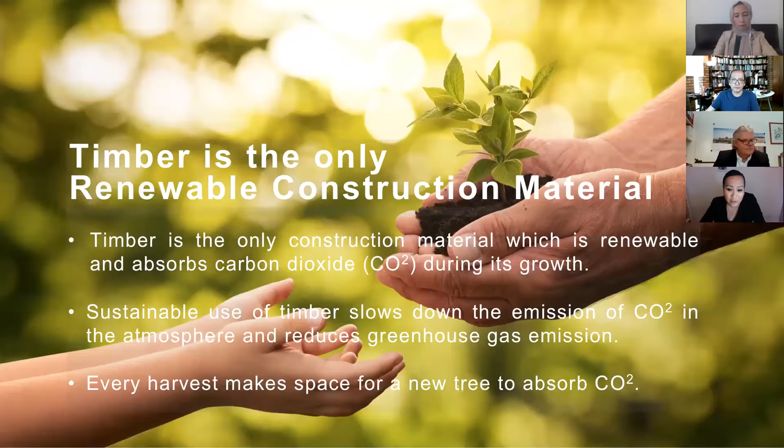What is not very common and well known is that the use of timber can help to save the climate. Sustainable use of timber can slow down the emission of carbon dioxide into the atmosphere and reduce greenhouse gas emissions. The use of timber helps to save the climate more efficiently because it's not only renewable, but also every harvest makes space for a new tree to absorb carbon dioxide.

The use of timber not only reduces the environmental impact on the planet, it also helps to reduce the consequences of the industrialization of the 20th century. Now we need to build a better environment for the next generations. The next point I need to talk about is the source and where the timber is coming from. So now we go back to Europe.

Forests cover about 30% of the earth's land. Austria is a small country in the center of Europe. It's one of the countries in Europe that has the highest forest coverage. In Austria, about 50% is forest area, and that equals 3.4 billion trees.

There is always a concern about what happens if you use too much timber for construction. But in Austria, in Europe, we are quite lucky because we have sustainably managed forests. More trees are growing than being cut down for construction and other uses, so we will not have a shortfall of timber material and bring harmful impact to the environment.

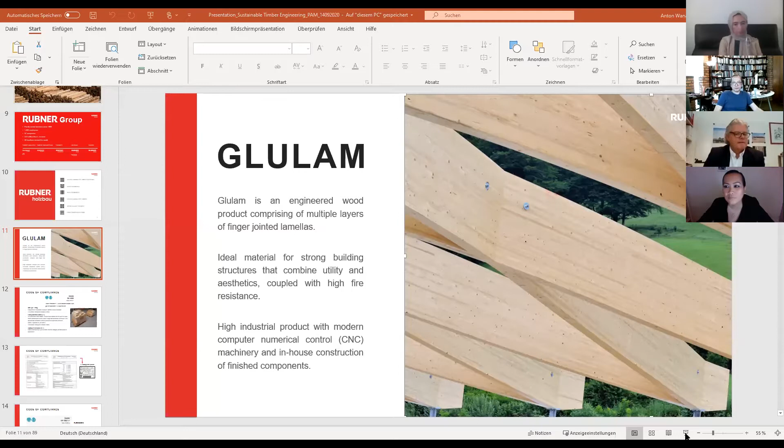Okay, ladies and gentlemen, let me quickly start my part. I'm really happy to be here, and it's my big pleasure and my honor to talk about glulam as a material, and then to tell you a little bit of the story, what brought us here to introduce glulam in this part of the world, and about this journey which brought us here, starting all with the Mactan Cebu Airport project, which I will talk about a little bit more in detail later on.

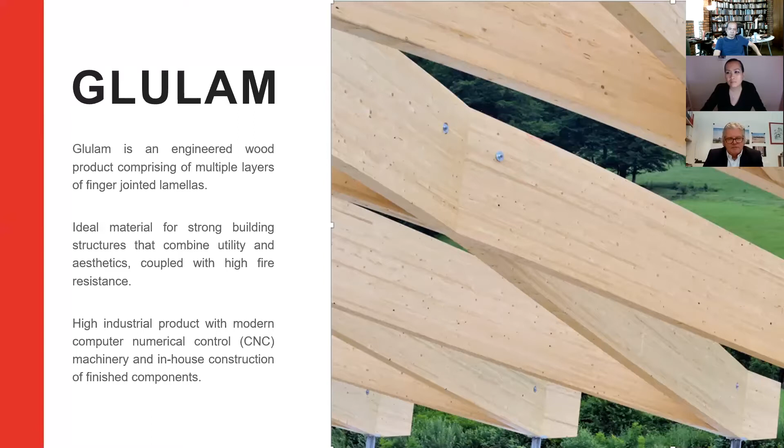But let's continue first with the glulam itself. So as Phyllis has told you, first it starts with the material itself from the forest. And what we then have to make out of it is an industrial product, which we can be sure is always at the same quality with the same properties. Because any natural material always has a range of qualities and a range of properties. But with this process, making it from the natural material to lamellas, to an industrialized product, this is the step where we are in a position to do engineered structures with it.

And the code of compliance, how glulam is manufactured in Europe, where most of the glulam in the world is coming from, all following European codes, is EN 14080. It's more or less the golden book for manufacturing glulam. If you set up a glulam factory, there has to be an initial type testing. This is a very long and very painful process with hundreds and hundreds of samples being tested, to make sure that all the machinery and all the process is in place and in compliance with the code. And as part of the code, there is the factory production control.

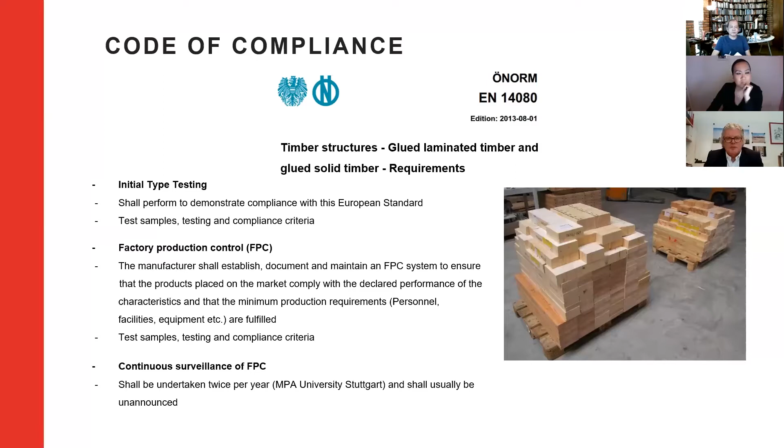That means every day, as a daily routine, numerous samples have to be taken and tested. And on top of that, there is a third-party inspection twice a year coming out of the blue without further notice, checking if your own in-house factory production control is in place. So this is to make sure that we really have a continuous quality on the product. And with that, we have this CE marking.

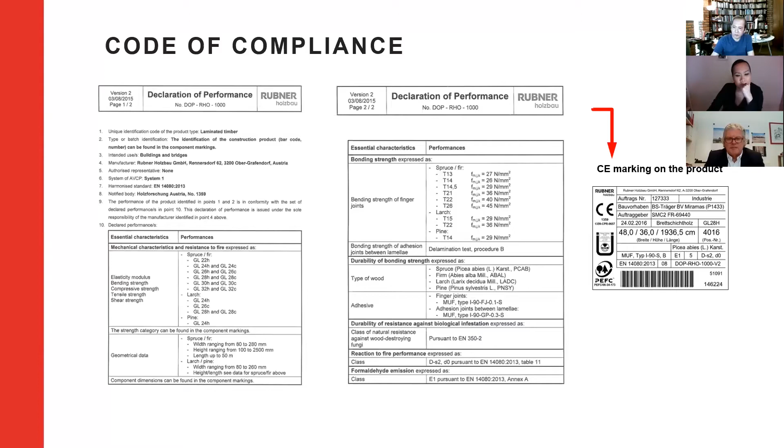So that means each and every little piece coming out of our factory, and not only out of our factory, of all factories in Europe manufacturing following this code, has to have this sticker on it. It's a small label giving all the information about the quality, the size, and the properties of this material. So you can be 100% sure that what is manufactured following this process fulfills the requirements you have up front.

So up to now, we have only been talking about the material, but just as important is to have a reliable instrument for the design, because we need to know how to design all these structures. And for the design part, we're also relying on European codes. There is EN 1995, Eurocode 5. It's the design code to which timber structures have to be designed. Compared to other codes in the world, I can say that even the basic design code, Eurocode 5, is one of the most advanced design codes for timber structures in the world.

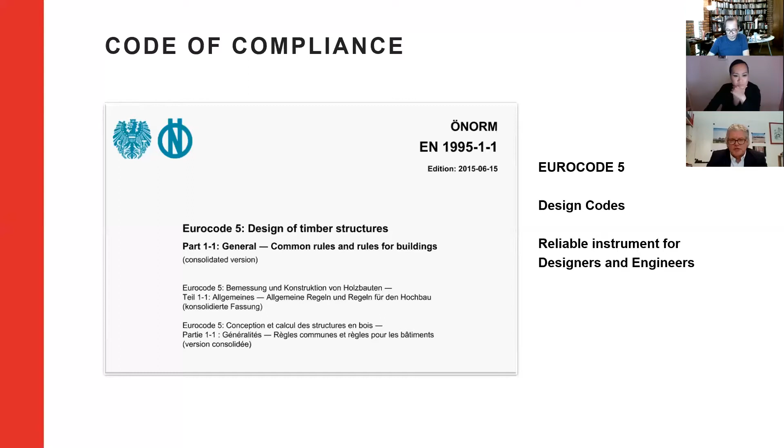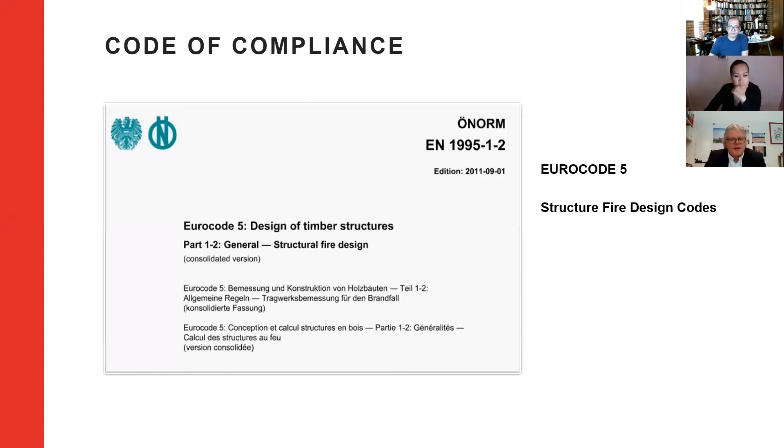And on top of that, there is also an instrument for how to design for fire resistance. Inside Eurocode 5 there is also the code for structural fire design. So we have the material, which is tested. We have the design code for the structure and for the fire design. And we have all the certificates. And with these instruments, we can now move on and think about how to make buildings with it.

In Europe, that's a long story and not really something new. But to take it into Asia, there are some considerations and a number of questions I'm always being asked. The main considerations and issues people have here are how to deal with fire, how to deal with termites, and how to deal with the tropical climate. So let's have a closer look, topic by topic.

First, fire resistance. As I've said just before, we have this fire design in Eurocode 5, where a particular part, EN 1995-1-2, is only about structural fire design. And the idea behind it is to achieve fire resistance by oversizing. Timber is a combustible material, so this is nothing we can really change. But it's very predictable how it behaves in fire. That means we have a charring rate of generally 0.7 mm per minute. And with this information, we can then design the remaining section of the glulam and make the justification for it.

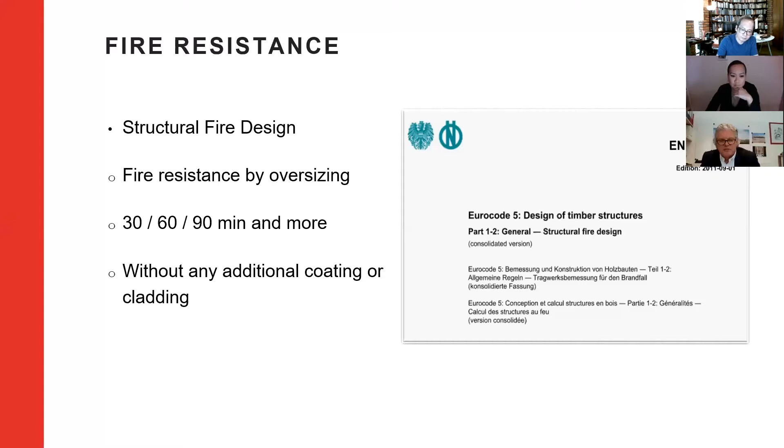So that means we can design a timber structure for 30, 60, 90, or what we now have, especially in Singapore in some cases, 120 minutes fire resistance without any additional coating or cladding. It's simply by pure oversizing for what we are losing during charring in the case of fire. So this is the concept behind structural fire design following Eurocode. The next topic is the termites.

So we also in Europe have some insects, and sometimes we have to do something against that, but termites is a different story. I have learned there are some preventive measures which are more or less given things in Asia. That means chemical ground treatment is more or less done in all of the construction sites, including some measures like termite mesh in the foundations.

And what we can do in particular for the timber, and this is what we are doing, is chemical glulam surface treatment. That means it's a chemical treatment which is brush applied to the surface of the glulam. I have to say the glulam normally is coated anyway, either with 1 or 2 layers of surface treatment, just to protect it from getting any dirt or any stain into the surface. And before we apply this, we would apply an additional layer of anti-termite treatment.

And the other thing is, in the way how we construct it, we have to make sure that we make it as difficult as possible for the termites to access the timber. For instance, if we have a structure which is going directly to the ground, we always have to separate it. It's what is shown in this detail here. So never put the timber directly into the ground, which should not be done anyway. So we always have to separate it, so that there is at least a distance of 250 or 300 mm until it touches the ground.

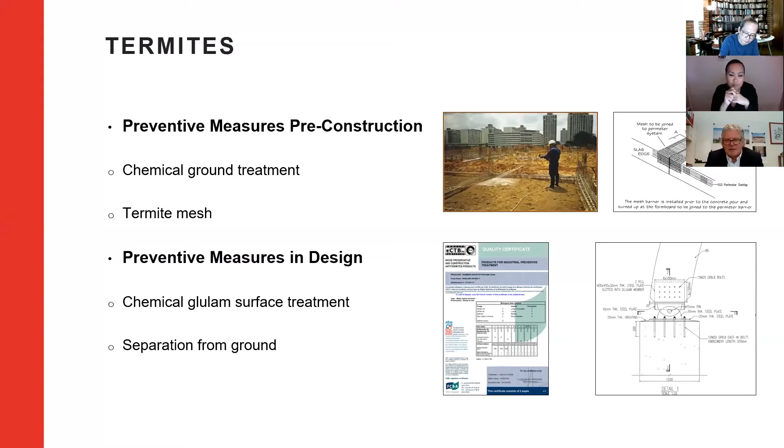And the third thing I've always learned, I've also learned from local people here, is that there should be a frequent inspection, let's say at least once a year, from a professional pest controller to make sure, just in case there's something going on, it's detected at an early stage.

The third topic, which I am frequently asked, is how to deal with a tropical climate. Well, climate always has 2 parts. The one is the temperature and the other is the humidity. Temperature basically is not the issue for the timber. Humidity is to a certain extent. With the combination of temperature and humidity, the timber is taking on a certain amount of moisture, and this leads to a level which is called the equilibrium moisture content. And there is nothing you can do against it, because this equilibrium moisture content is the amount of water the timber will take on under the environment it is exposed to. And this depends on the temperature and on the humidity.

And we have put in here in this slide the climate graph of Kuala Lumpur, which tells you about the temperature and the humidity. And I would say the maximum is a temperature over the year of about 33 degrees Celsius and a relative humidity of 66%. And there are calculation methods and graphs where you can find out with these 2 figures what would be the equilibrium moisture content. And for these 2 figures, it would be 11.7%. The minimum would be, following this graph, 22 centigrade, about 60% humidity, and that would lead to 10.9%. And for the timber, however, in the long run, whatever is lower than 20% is absolutely no issue at all.

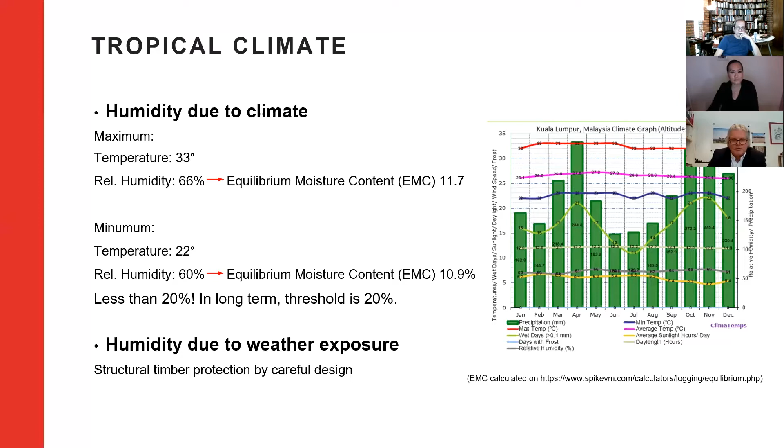So with this basic information, it would now be my great pleasure to move on to one of our proudest projects we have ever done. And again, as I said before, it was the first project we have done in Asia. And at the same time, even personally for me, a journey to introduce this type of construction in Asia: the Mactan Cebu airport in the Philippines. The architect was IDA from Hong Kong, Mr.

Winston Shu, and the client was a joint venture from Megawide, which is a Philippine construction company based in Manila. And on the other side of the joint venture is the GMR Group from India, the fourth largest private airport operator in the world. And the joint venture of these two companies did not only construct this terminal, they are also the operators of the airport, because following a public-private partnership model, the Philippine government has handed over the concession to operate this airport to this joint venture for the next 25 years.

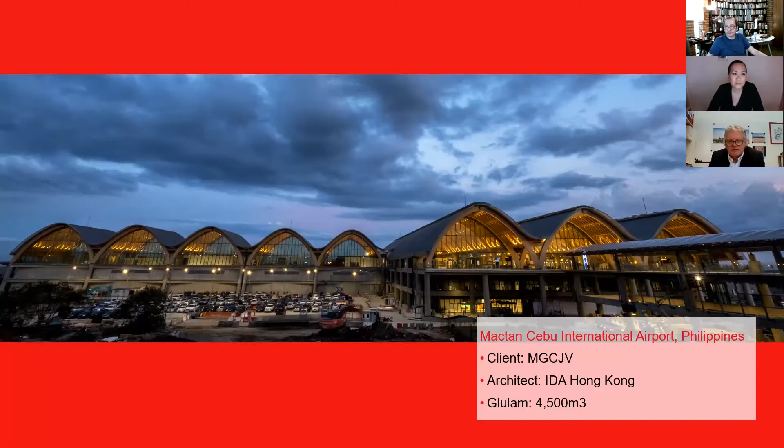And I would like to start with a short story. When I was first in touch with this project, it was almost 5 years ago, in January 2015. We, as the Rubner Group, exhibited at one of the biggest trade exhibitions in the construction industry, the BAU in Munich in Germany. And I was personally there for 2 or 3 days. And the first day I was back home in the office, one of my colleagues called me and said, Anton, somebody was just here to ask us about our involvement for an airport building in the Philippines.

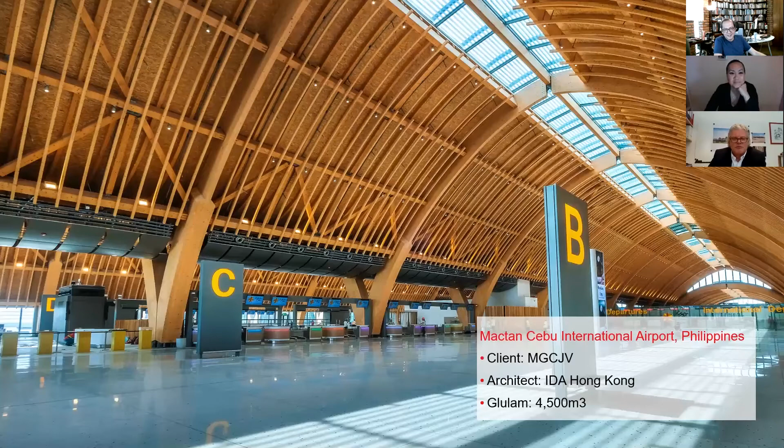And I said, what? The Philippines? Airport? Forget it. Nobody will ever build an airport in the Philippines. Not from European timber, and an airport building in timber in the Philippines, forget it. It will be far too expensive, too complicated, the transportation, all the foreign people, hundreds and hundreds of problems, forget it. We will not do this. Well, what a mistake that would have been.

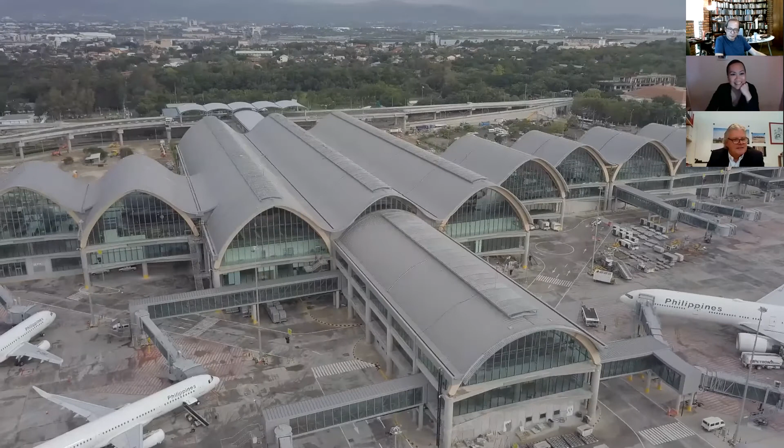Because now, only 2 years later, the Mactan Cebu International Airport is open, and it's now the second largest airport in the Philippines, serving more than 12 million passengers per year. And from this new terminal building, more than 3 million passengers can depart with 26 airlines to 23 international destinations. And whenever I see these pictures, I'm really excited, because my first reaction was, no, forget it, we will not do it. And in the end, I'm very happy that at one point we changed our mind.

And why did we change our mind? The idea is the concept of the airport itself. What you see here is the first architectural concept, because the idea of the operators was to build something absolutely extraordinary, something the world has never seen before. The idea was to build the world's friendliest airport, an airport that feels like a resort, or a resort that has an airport, to make a completely different experience for the traveler when he is either departing or arriving at this airport.

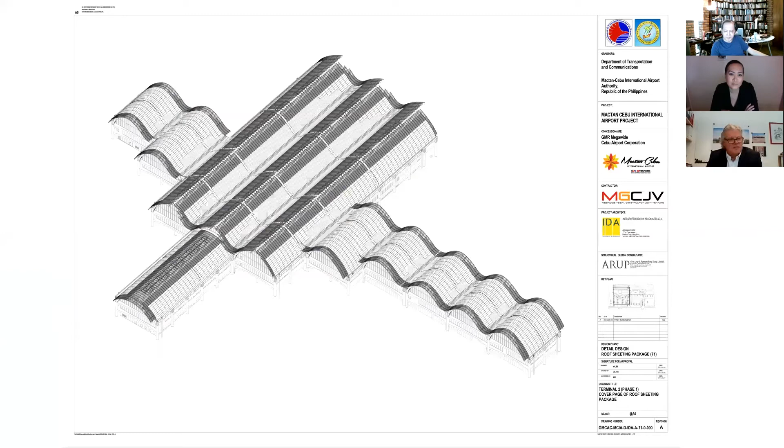And with this idea, they made a decision about the surface appearance when you enter the building. And from this point on, it was clear that the internal feeling has to show the warmth of a timber surface. And at this point, they had no idea that it would be possible to build it entirely from timber, because the original design intent was to build it as a steel structure and only clad it with timber. The terminal building has a footprint of roughly 25,000 square meters, and it consists of these wave-shaped roof barrels, each having a span of 30 meters, with the beams separated by 13.2 meters.

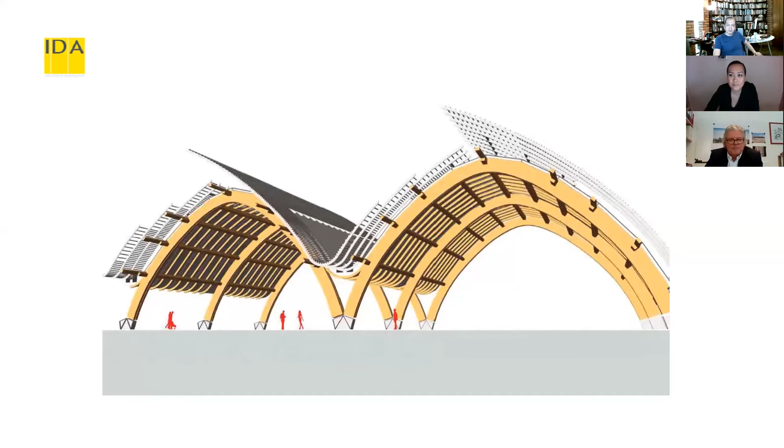And what you see here now is more or less the whole information we got during tender stage. It was a design and build tender, and for a steel structure, the design ideas had been far more advanced. As I said, the original idea was to construct it with steel and only clad it with timber. And then they found out that in Europe there's some technology so they could do it completely with the original material. So what you see here is what our tender design was.

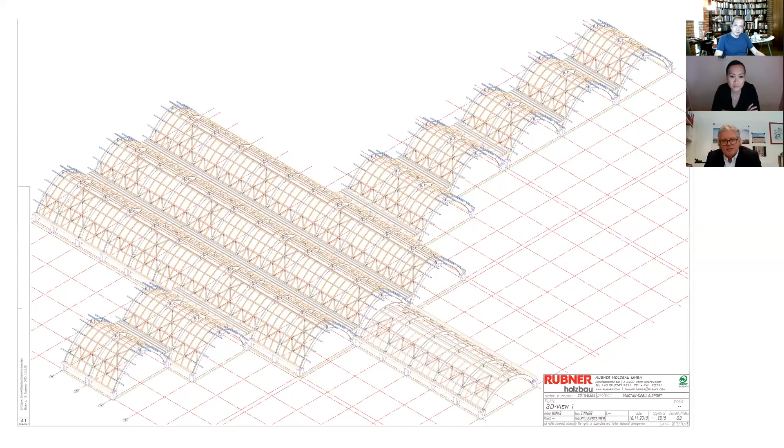So we made a big investment to participate in this tender. I was personally also responsible for the tender process from our end, and we invested, I don't know how many months of design work and engineering work, even upfront. And also these 3D models we had already made during tender stage, not even knowing if we would ever be successful with that. And then we submitted our quotation, and they invited us for technical discussions.

And the original idea they had is, what you see here is the slab, the concrete slab. On top of the concrete slab, 6 meters high, they wanted to have steel columns, and on top of these steel columns, the idea was to connect these timber arches with a moment connection.

Well, this was possible in a way, and we have designed it following this, as it was the request from the beginning, but some problems would have been involved, especially for our client. The one thing was to have this extra trade in between the concrete and the timber of the steel columns. The other was the installation process would have been much more complicated and more time consuming. And one of the bigger concerns also was how to achieve the accuracy of this steel work, because this type of structure would not have allowed any intolerance.

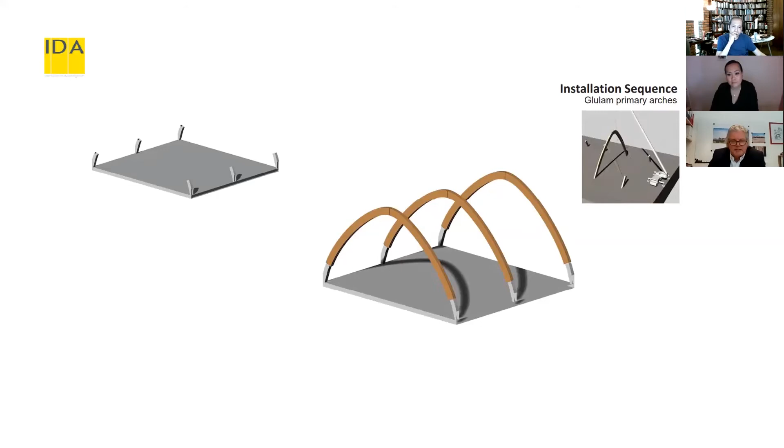So at one point they then asked us, would there be another option? And our suggestion was then to bring the arch all the way down to the slab level and skip the steel columns. That was possible from our end, but also some extra challenges have been involved with that. One of these challenges was that there was a request up to 6 meters from finished floor level to achieve a fire resistance of 120 minutes.

And the other challenge was that it was not allowed for us, for architectural reasons, to introduce any diagonal bracings from this 6 meter level to the ground. And on top of these two issues, of course, the size of the arches has been a little bit bigger. So all the transportation issues got a little bit more complicated than they had been anyway.

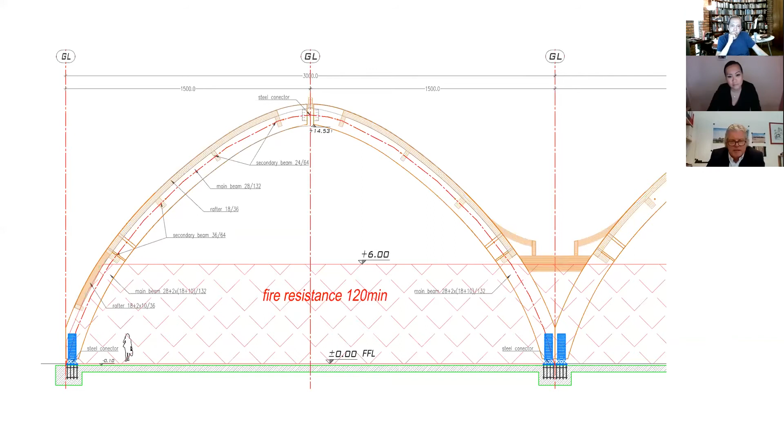And what you see here on this slide is what I explained before. This is the excerpt of our structural model. We have a very traditional diagonal bracing, also made from glulam bars, horizontal members between the main beams. But all this is stopping at this level, 6 meters above the finished floor level, because for architectural reasons, they didn't want to have any bracing. So they wanted to have it completely clear from any structural element below this 6 meter level.

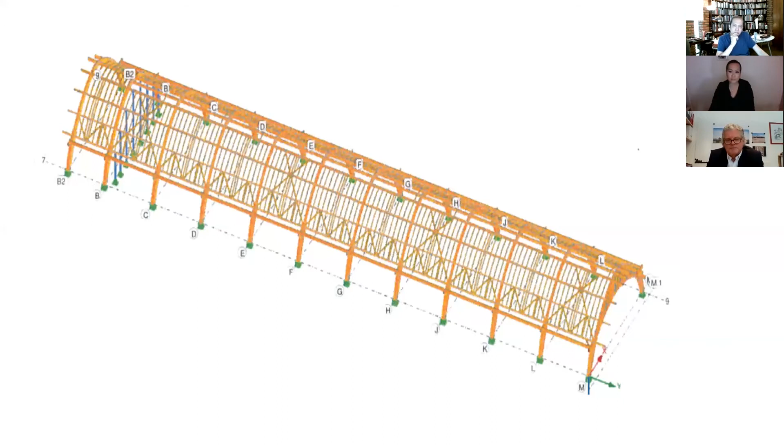And the problem was one of the governing load cases has been the seismic design. That means the horizontal effort in the seismic case had to be swallowed completely by this leg of the arch, because up top it was stabilized by the horizontal members and the diagonal members, but going from these last horizontal members to the floor, no stabilization at all. So this was really one of our biggest headaches design-wise.

And the solution to this was this design of the beams. So we have one beam in the middle, which is normally 280 mm thick. And then we have made multiple layers, all in all 5 layers of glulam beams glued together to this massive bottom section of this arch, which had a maximum width of 840 mm. And when I saw the first ideas from our engineers, I said, guys, you are crazy. It will be far too big. It will look ugly. And in the end, I have to say, it looks just fine.

This is what you see here. 5 layers of glulam block glued together. And with this, we could achieve the 120 minutes fire resistance, because there's enough material, even in the charring case. You're losing roughly 80 mm, 85 mm either side in this 120-minute fire case, and also enough strong material to absorb the horizontal impact in the seismic design. And yes, this was in the end what they accepted. So we could start with the production.

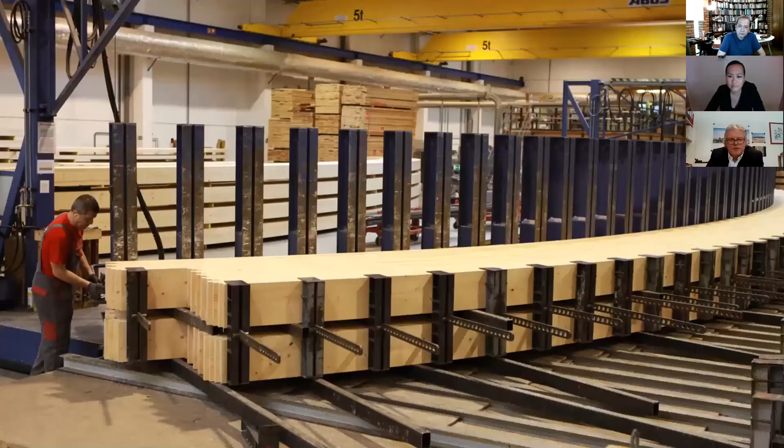What you see here is how a curved glulam beam is made. These blue columns in the background are set up automatically in the way the beam is shaped, and then always a pair of beams consisting of these single lamellas is pressed against this form created with these columns. And once the glue is hard, it cannot move anymore. That means the beam is keeping its shape, and this takes normally for a beam this size somewhere between 3 and 4 hours, and then it can be released from the press.

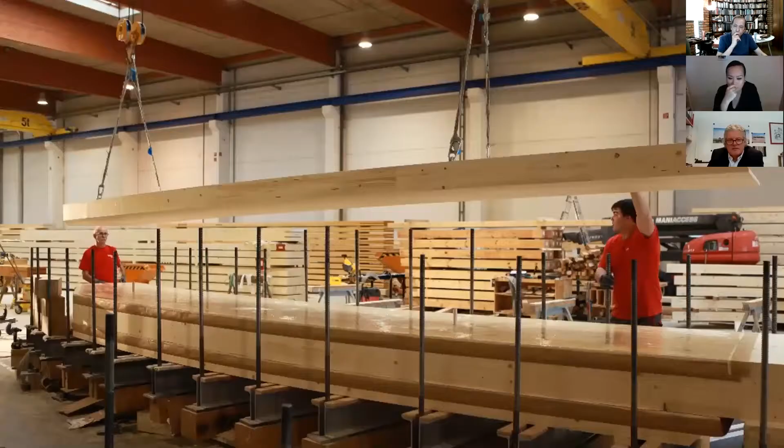It is planed so that all 4 sides are really nicely surfaced, and then it is cut to size, all CNC machined. Nothing is done by hand. The cuts and slits, slots and drills are all done by a huge CNC machine.

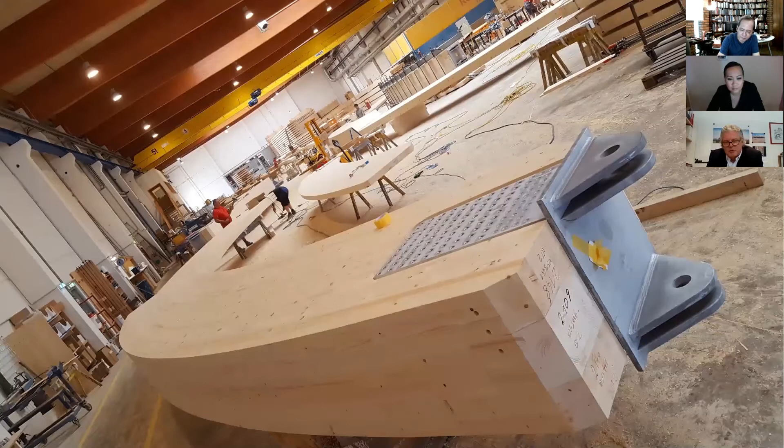And what we have here is then the process of block gluing, so that several layers of glulam are glued together to achieve the right thickness. This has to be done in 2 steps. So the first step is gluing together only 3 layers. Then we had to install this massive bottom hinge connector, which is connected to the glulam with not less than 120 screws either side.

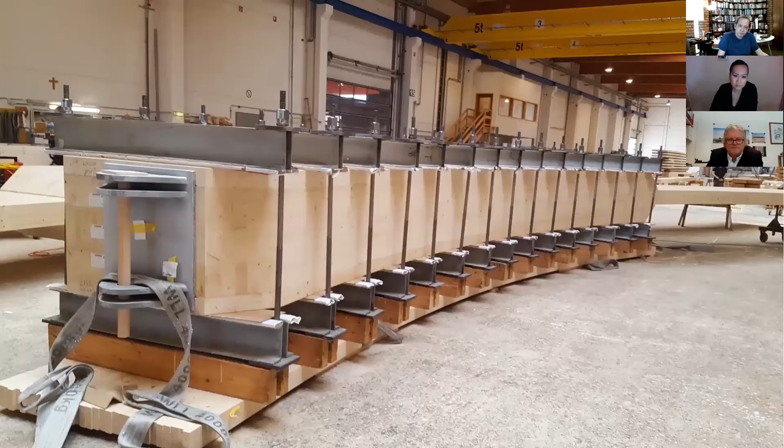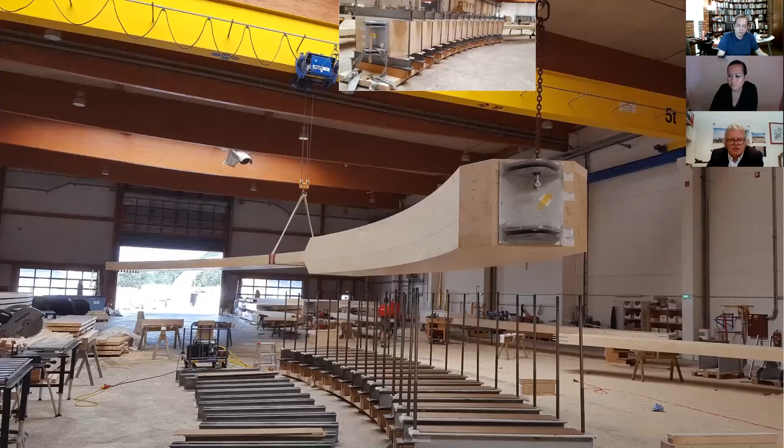And once this is installed, the last layer on both sides is again a number of 2 glulam pieces, each 100 mm thick, attached to the beam. And this is the finished glulam beam itself. Next step then is to wrap it carefully, as it has to go on a long journey.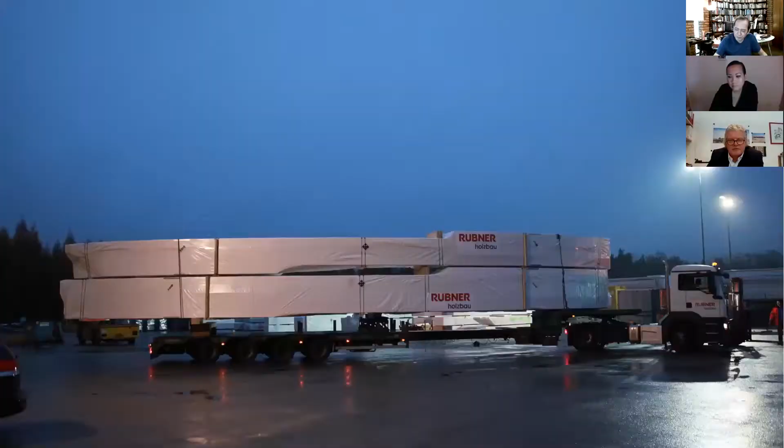And this long journey was a headache in itself, I have to say. We had to invest really a lot of time to get a good solution, but in the end, we found a way how to do it. Our factory is roughly 30 kilometers away from Austria's biggest river, which is the Danube River, and there's a small river port. So we put all the glulams in a river barge.

From this river barge, from Krems port, it went upstream the Danube River, and there's the Rhine-Main-Danube channel. So it's an inter-European waterway connecting countries like Austria with the sea at Antwerp, Belgium. And here we had to shift everything into a seagoing vessel, which then went all the way to the Philippines. And from our factory to site, it took roughly just under 3 months.

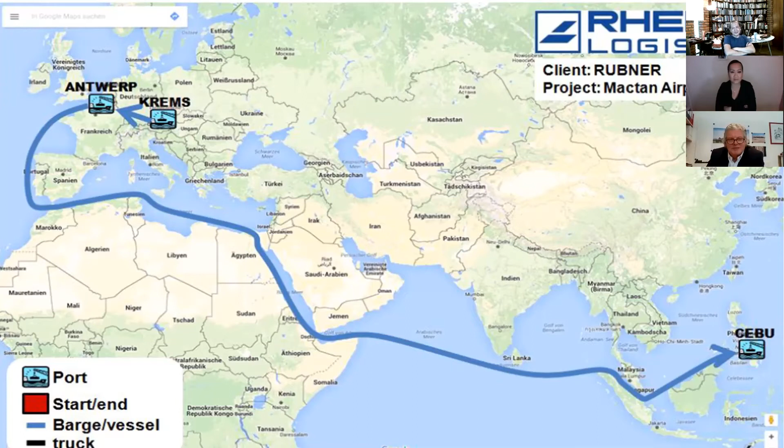In the end, it worked out really well, but I have to say the last 10 kilometers from Cebu port to the airport itself by truck in the Philippines is what cost me 95% of the trouble. So once again, this is the river barge leaving Krems port, and this is how we discharged it at Mactan Cebu port. Between these two images, there have been almost 3 months.

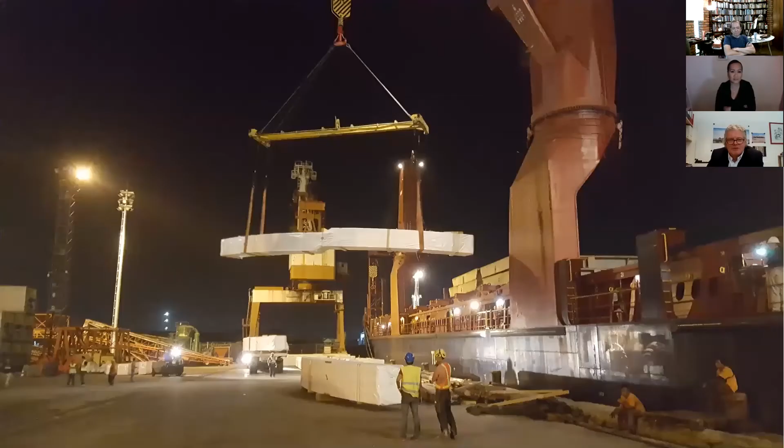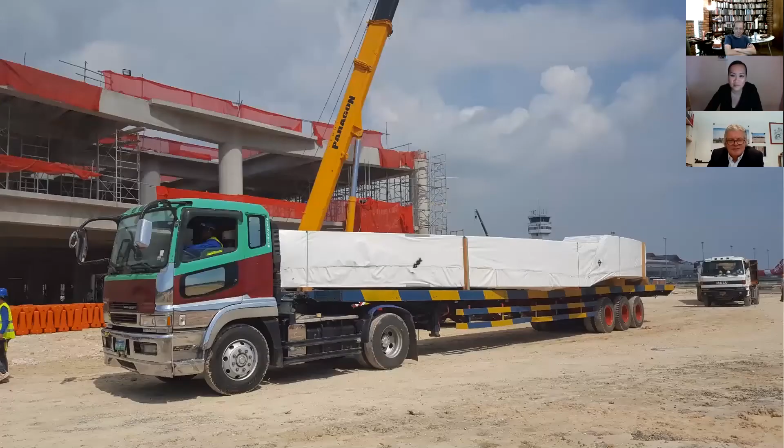When we received the first shipload, I have to say we split it up in 3 batches, so 3 shiploads. I was personally attending a full night at the harbor to make sure that we get the first beams on site in the right time. And this was a really very exciting moment for me to have the first beams arriving in the Philippines. And the next morning, we arrived on site with extendable trailers. And I was really very, very happy when we had all the material here.

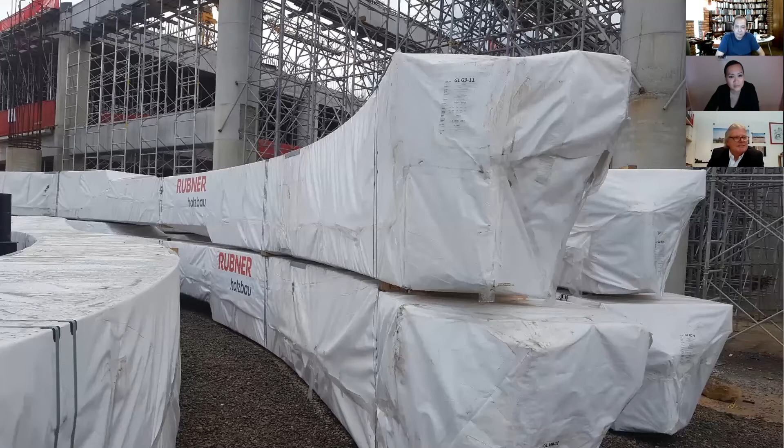But we can never forget, this was a very long story for us to get all the material designed, fabricated, and then arriving on site. But this was in the end only the beginning; this is where the whole work started for us on site. I was very happy that the design of our packaging and how we wrapped it did really survive the whole journey and the whole process without any damage.

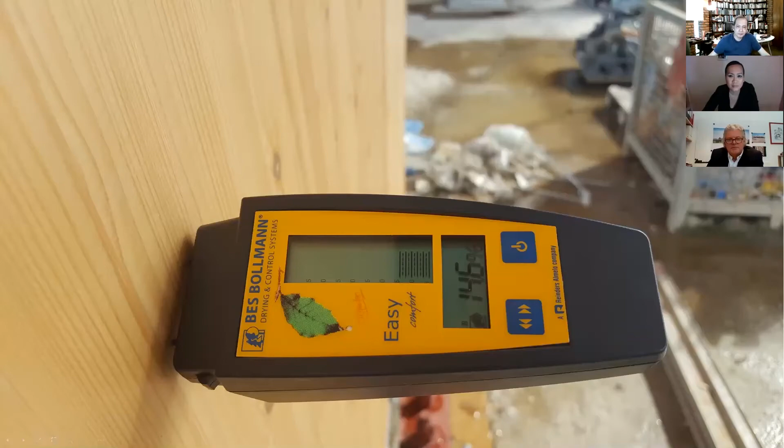One of the first things I have done is to check the moisture content, and we were at 14.6, which is in the range and is absolutely fine, because this is less than what we identified from the climate charts. Sorry. And yeah, once we unwrapped everything, we have our own installation team there. A number of 8 guys coming from Europe installing the complete airport with local equipment of truck cranes and cherry pickers.

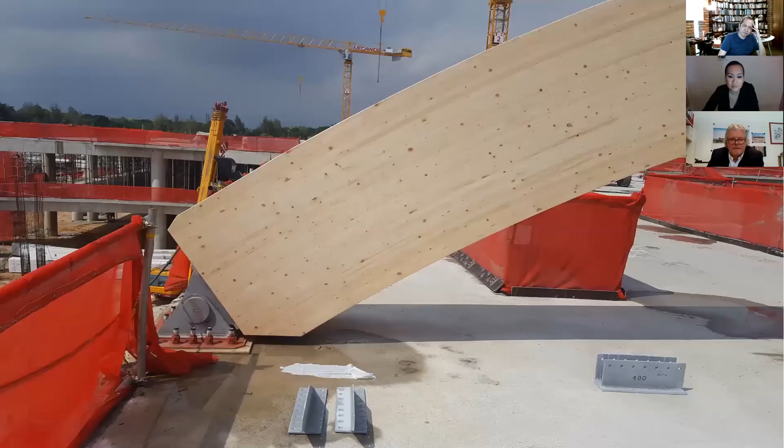The idea how to install it started with putting in the bottom hinge connectors first with these massive bolts, and always 2 beams, creating a pair, and minimum 2 cranes. Sometimes we had to use 3 cranes. We installed 1 beam after another. And this was something that we designed also step by step, very carefully. And yeah, it worked really well.

At the beginning, it was a little bit slow. And then after a few days, nobody could believe, especially not the people from our client, how quick the installation really was. So with only these few people, maximum we had 8 people on site, we installed sometimes 2 or 3 of these grid lines every day.

And one of the key elements of the speed of our progress there was the design of the connections. We purposely designed the connections in a very traditional way. You see these steel connectors. All these steel connectors are connected to the glulams with fully threaded screws on site, because if we had done that in the factory, that would have complicated the transportation too much. So it was easier to send this separately in a container and then install it shortly before erecting the beams.

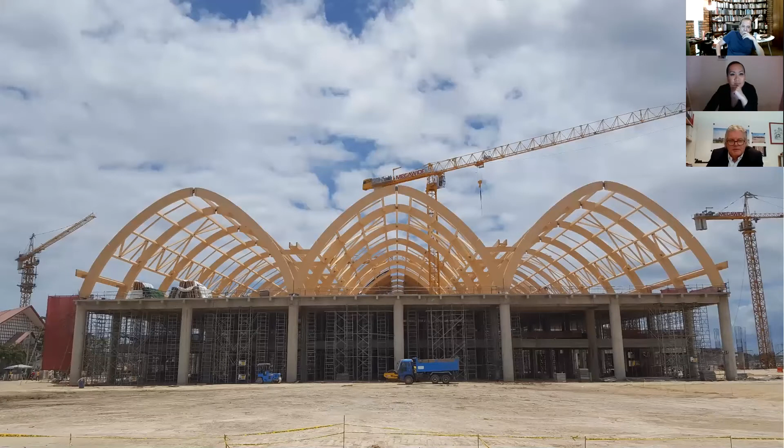And the connection of these diagonal members and bracings and these short tie bars was only one small bolt in this steel-to-steel connection. And this went really perfect and was a very, very quick operation. So here you see the main departure hall on the departure level. And this was after the second of 3 batches of glulam had been installed. So from the very beginning to this, it took us roughly 3.5, 4 months.

Yeah, and here you can see on the left side that already the roofing company has started to install the roof covering. And this is almost completed from the other side where the entrance is.

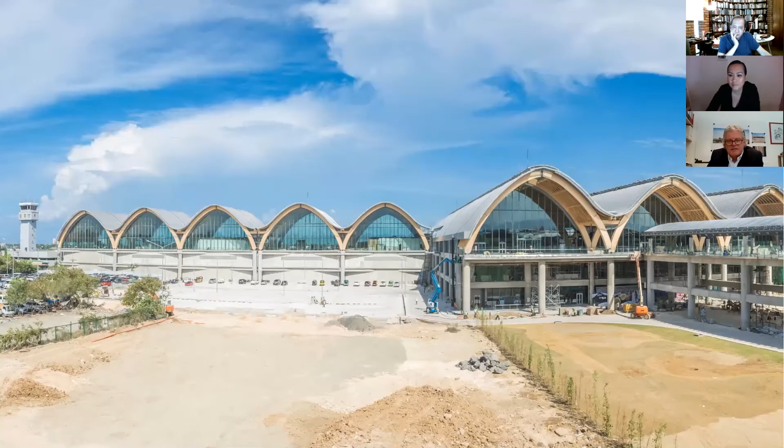What I would like to explain here is that the glulam itself on the end beams is outside the facade. We have been talking about this before, about the exposure of glulam, and these glulam beams are definitely exposed to the outside environment, to the air, so to the temperature and to the humidity. But this is not an issue and not a problem as long as it's covered. And they have quite a good coverage here, but the coverage is not so good on this bottom end here.

And what you see, even though we did not need it from the structural point of view, we have also put on one extra layer of glulam. And this is more or less for these beams only a sacrificial layer, which could be replaced maybe after 20 or 25 years. What is not completely finished on this picture yet, as it's done during construction, is that these gutter beams have then later been cladded with metal sheets.

Yeah, and we made good progress, and after a couple months, this is what you could see from the inside. These very small strips of glulam timber, what you see here, they are at the separation of 620 mm, always one long and one short of these decorative glulam timber strips. It was a very, very long discussion with the architects until we could agree on the final setup. But if you have a look at this now, I can say it really paid off because it looks definitely great. And it swallows a lot of the size of the glulam beams itself.

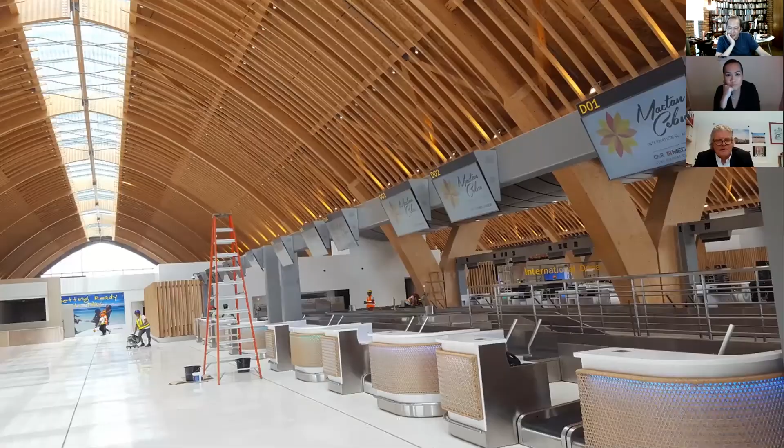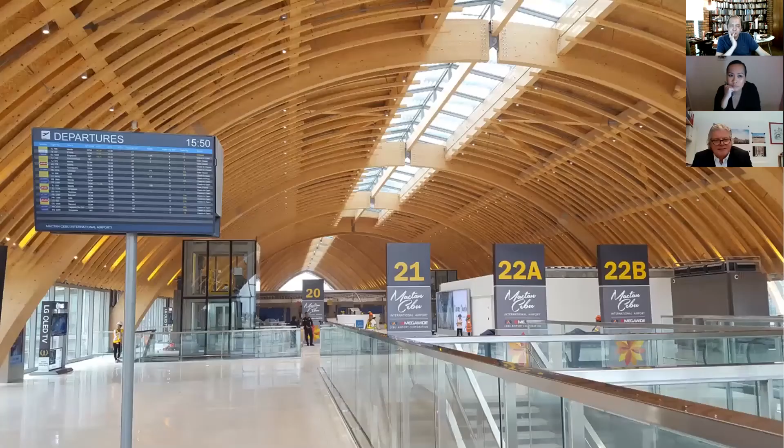Yeah, another few months later, the fit out works have already been in full progress. This was taken, I think, in May 2018. I have to say I had the honor to go back in May 2018 because we have been already in discussion with the same client about the next project. And this was by pure occasion at the same time as the opening ceremony for this airport. Yeah, you see some of the areas are still under construction. Some of the areas are already finished to an extent where you would really love to be there and enter a plane from this terminal building.

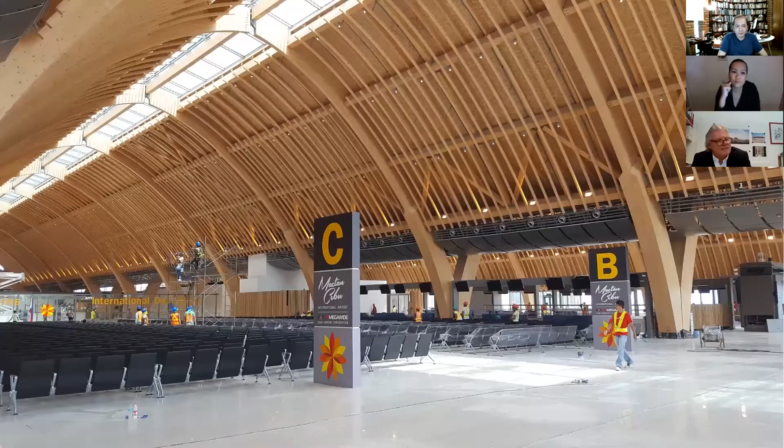This is almost finished. You see they have put up the seats already for the opening ceremony, which then took place in the last days of June 2018, even with the President of the Philippines attending the opening ceremony. And you see here also the impressive light system they have installed here, all hidden behind these decorative timber strips.

Yes, and this was the story of the Mactan Cebu airport, which, when I was first approached by my colleague, I said, forget it, that will never be done. Nobody will ever build it. And then a few years later, in the night of the 1st July 2018, the first airplane docked onto a passenger gate of this new terminal building. And it was really a big success for us, and the client was very, very happy with us, very satisfied.

And this brought us into the position to talk about the next project, also in the Philippines, which is Clark International Airport. Clark Airport is about 80 kilometers north of Manila, and the Manila airport is quite congested, and there is not much room there for any extension. So they decided to extend the Clark Airport to release a little bit the pressure on the Manila airport. The idea was also similar, to have a glulam structure. And this is what you see here.

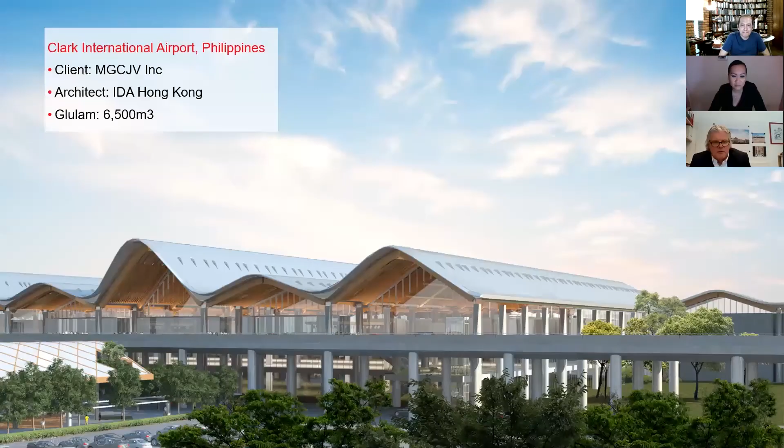The main difference is that we don't have the same height of these beams because it's different. So we have 3 different types of beams. And the major difference is that the glulam structure does not go all the way to the slab level, because they decided to have 6-meter concrete columns and start with the glulam from these concrete columns on. But other than that, the idea is still quite similar. We have a similar connection strategy for the secondary beams and also for the bracings. And also the installation idea is all very similar.

However, the size of the building is completely different, as the footprint of this one is 47,000 square meters, so almost double that of Cebu. And what you see in the background is, if I'm not wrong, Mount Arayat, one of these typical Filipino volcanic mountains, and the architectural concept was to display the shape of the mountain ridge in the different levels of this roof. This was the design idea behind it.

Inside, they have also changed the material of the soffit. This is a white metal liner as a soffit, and with the white metal liner soffit and the concrete columns, you see that it's a little bit of a different appearance. It looks a little bit more industrial, but it's not less impressive, as the height is more than 20 meters in this central middle bay.

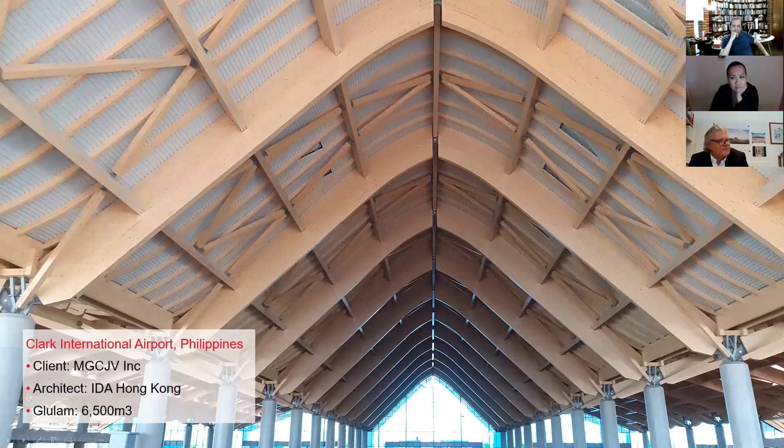It's a different image. So let's move on now from the Philippines to another very important country in Asia. Might be interesting for you. It's your neighbor country: Singapore. Singapore started, I would say, 3 years ago to think about glulam. And in the meantime, we have done a minimum of 15 different jobs in Singapore.

In Singapore, we are working with a local partner, as the job size there is significantly smaller than these two big projects we have done in the Philippines. That means we need somebody to take care of the installation and to keep in touch with the local authorities, to handle the submissions with the Building and Construction Authority and things like that.

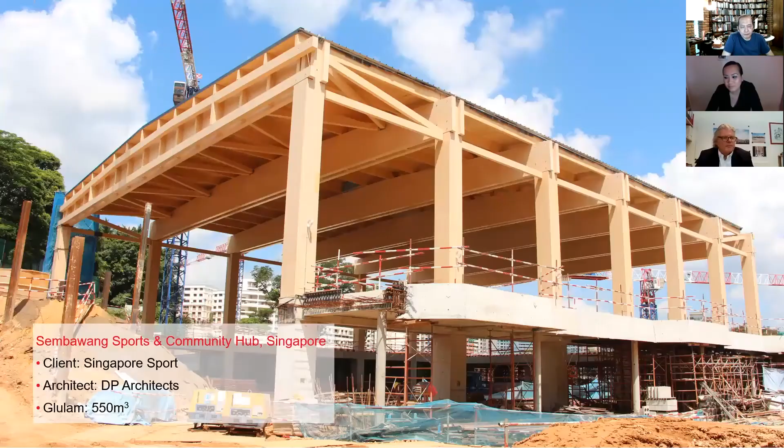One of the most impressive things we have built so far is this sport building. Unfortunately, I only have images during the construction process, as due to the COVID-19 situation there's some delay and it's still not completely finished and handed over. But the important thing I would like to show you is a sport building with

a 38-meter free span. These beams are all made of glulam, with a total length from outside to outside of just under 39 meters. We shipped them to Singapore in full length and in this double arrangement, as they are always a pair of two beams together, which we had already arranged in the factory, shipped together and brought to site together.

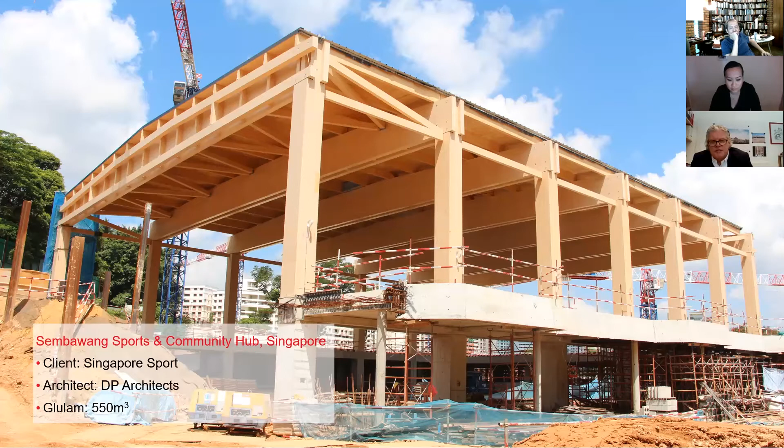These columns, with a spacing of roughly 8.5 meters, are also an arrangement of 3 glulam members, and the central member comes up here like a mortise and tenon connection. So this works with only very few steel connectors. The only massive steel connectors we had, which you can see a little on the next image, are at the bottom of these columns. The columns have a rigid moment connection with the steel. Otherwise we only have very small steel connectors.

So far I can say these are the longest spanning timber beams in Singapore, and I think in all of Asia at the moment. So this is the highlight in beam length or maximum free span that we have done so far in Singapore. From the factory perspective, we are able to manufacture up to 50 meters in one piece.

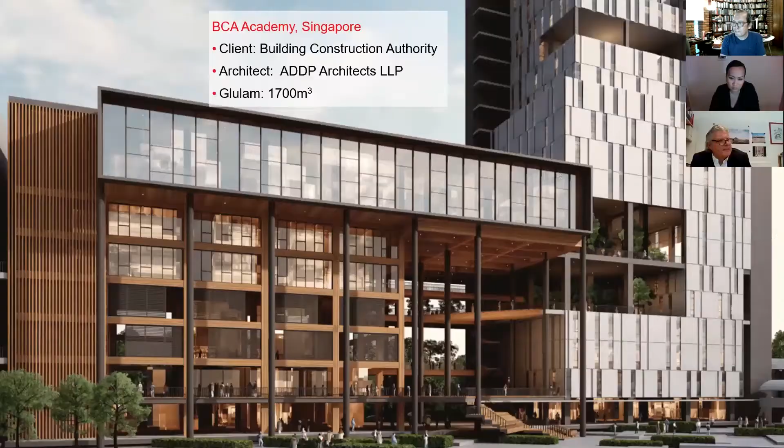And one of the buildings now in progress, which Mr. Locke, the architect, asked me to tell a little more about, but I have to be careful as it is still in progress. We just started to manufacture the first members for this project 2 or 3 weeks ago, so nothing has arrived on site yet. And due to the COVID-19 situation, there is some delay in the beginning of the installation process. The building is called BCA Academy Singapore.

BCA is the Building and Construction Authority in Singapore, and they operate their own academy. This is a multifunctional building with a 7-story timber block, and right adjacent to it, a 16-story office building. This should be the new headquarters and also the new academy for educational purposes. What they have in mind is to showcase the state of the art of sustainable construction, and also how the process is done. Of course, it's working with glulam.

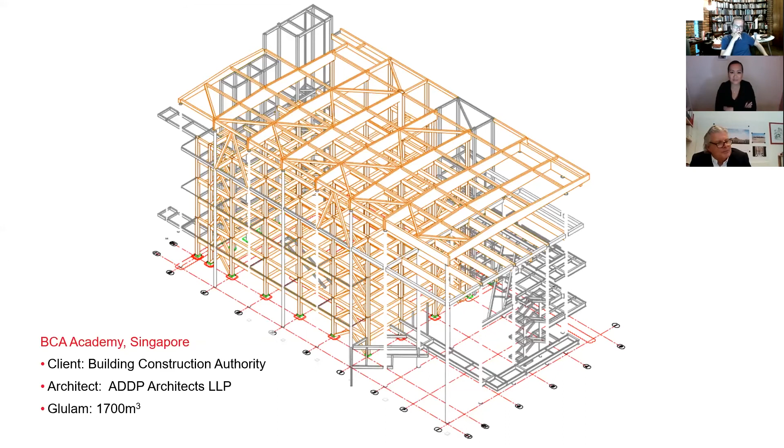I can unfortunately not share too many details of it at the moment, but maybe we can have a similar session maybe next year or the year after, once the building is complete and once I have the official clearance from our client, the BCA, then I can make you a separate show and a separate presentation of this building only. But please understand, it's a little bit too early at this point now. But it will be one of the most important timber buildings in Singapore in the future.

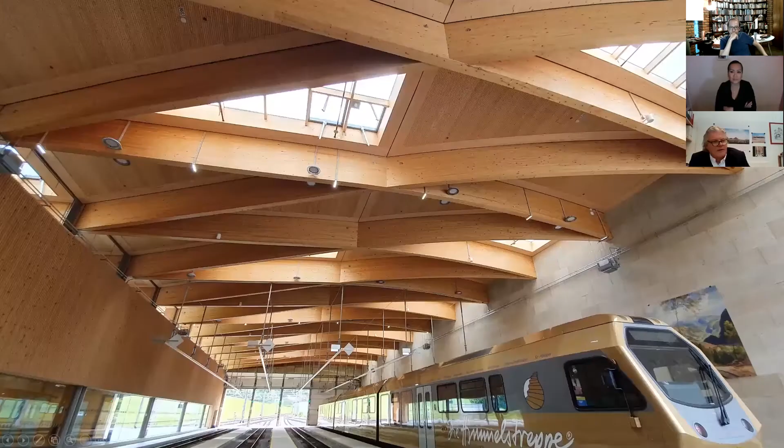Yeah, one of the other things I would like to show you is another use case, quite a typical use case for a train station. This is a train station, and they call it operation center for a small local train company. You can see this architectural feature with this diagonal beam arrangement, and a very nice looking timber soffit. This is made from 3-ply timber boards with a pattern of small holes. This is for sound absorption. And what they have also here is a maintenance center for the trains, where they do all the maintenance work. So it's not only train station, also operational center. So you see also for a train station, that would be quite a typical use case, what can be easily achieved.

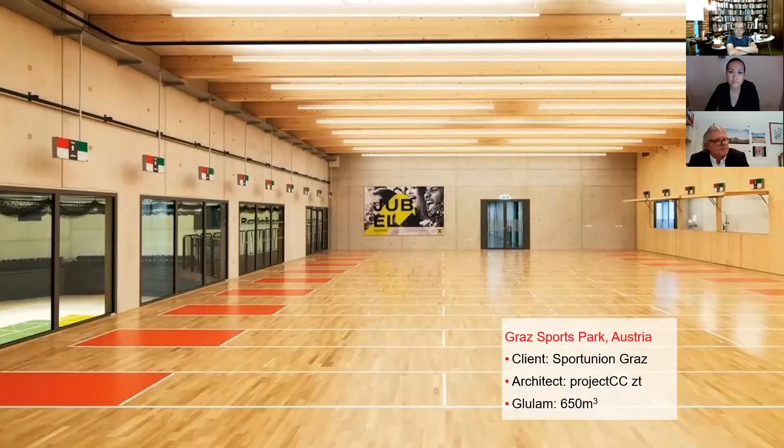I think we are now at the next, and this should be the final one, example. It's back in Austria, in the south of Vienna, around 2 hours driving from Vienna is the city of Graz. We have done a sports center there, and what you see here are beams with a full length of 50 meters. So the maximum length that we can produce is covering this sport building. And with these secondary members between the main beams, you see this quite square pattern in the ceiling, what they have also used for the illumination installation elements. And some secondary part of this sport building is a shorter sport hall. So you see this could be any type of sport building, any type of sport hall.

So I think this is the end now, the end of my story, which started with a project in Asia where I have never believed that this would ever happen. But sometimes you have to learn the lesson. And I can say I've learned the lesson, and I'm very happy that we can work in Asia now.